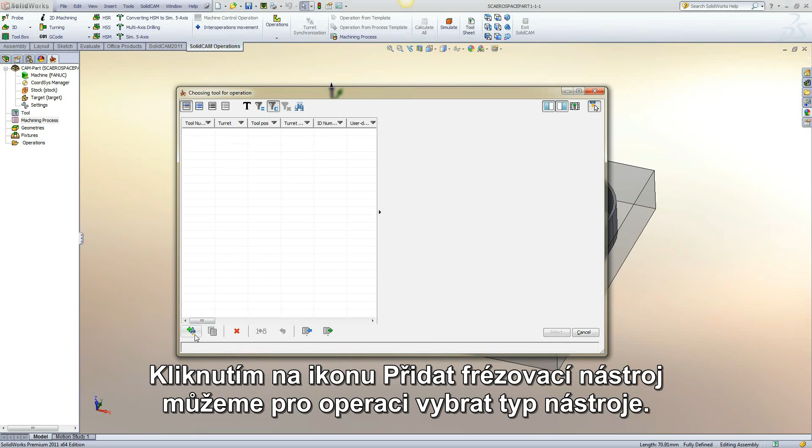By clicking the Add Milling Tool icon, we can select the type of tool to create for the operation. We will select Flat End Mill. Working from top to bottom, we must set the cutting diameter being used. We will use a 12 mm tool.

Setting the cutting length is important. The Technology Wizard uses the cutting length to calculate if multiple depths are needed to achieve the pocket depth. We will use 24 mm.

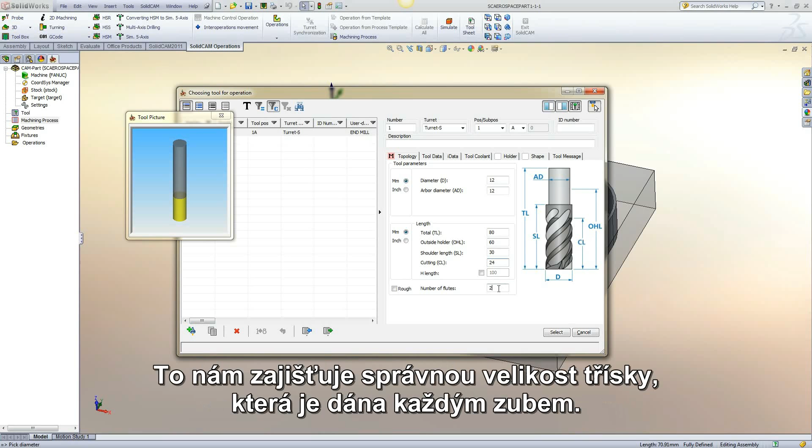Setting the number of flutes is also important. Setting the correct number of flutes will ensure the proper chip size is given to each flute. We will use 2 flutes.

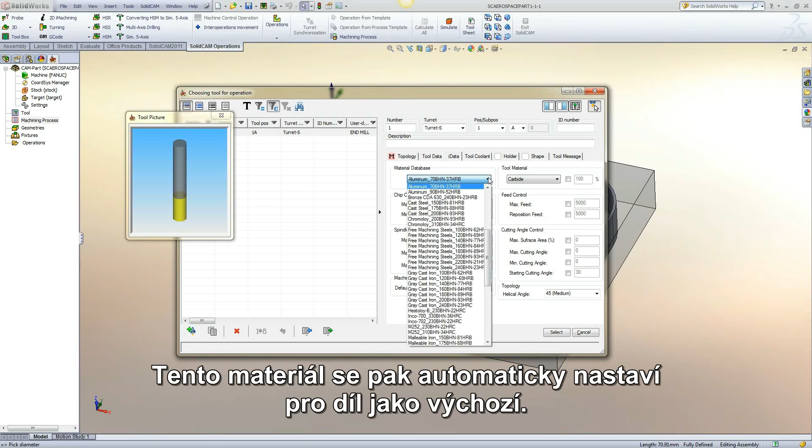The iData tab in the tool table is used to define parameters specifically to iMachining. It is possible to set a different material database for each tool. The database will be automatically selected using the part default. Selecting a different material database is used when machining different materials in one CAM project. A fixture is a good example of this. We will leave the default.

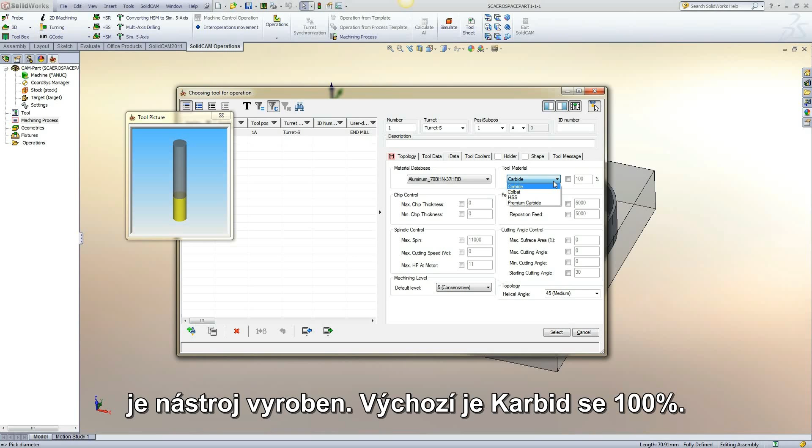Selecting a tool material adjusts the cutting speed for a given type of material the tool is made from. The default is carbide at 100%. By selecting a different material, a percentage adjustment will be used to calculate the maximum cutting speed. An override checkbox is provided so that a percentage adjustment can be set manually. We will select carbide.

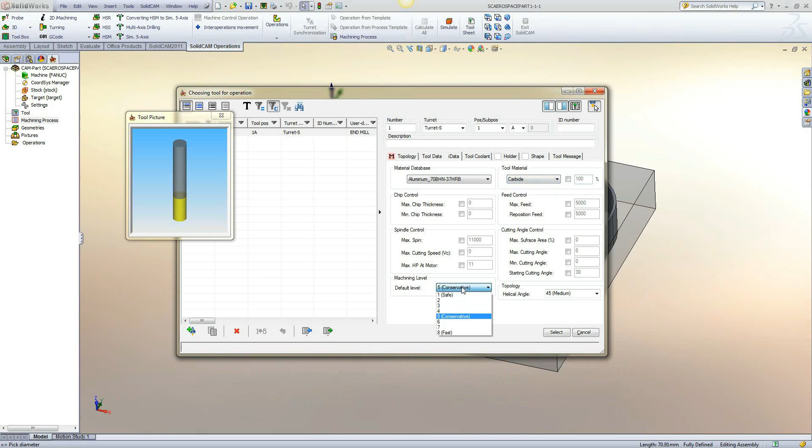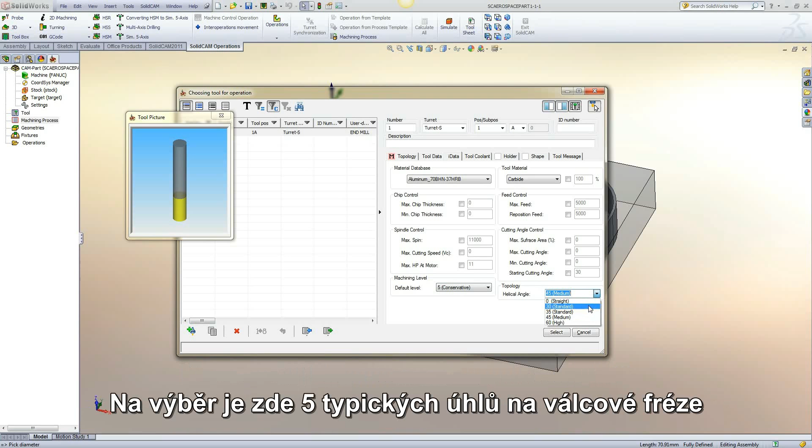Setting the default machining level will position the slider in the Technology Wizard to the level when selecting this tool. We will use 5. Setting the helical angle is important for calculating depths based on axial contact points, ACPs. There are 5 typical end mill angles to select from, or typing in a value can be used. We will use 45 degrees. After clicking Select, let's set the pocket depth to 30 mm.

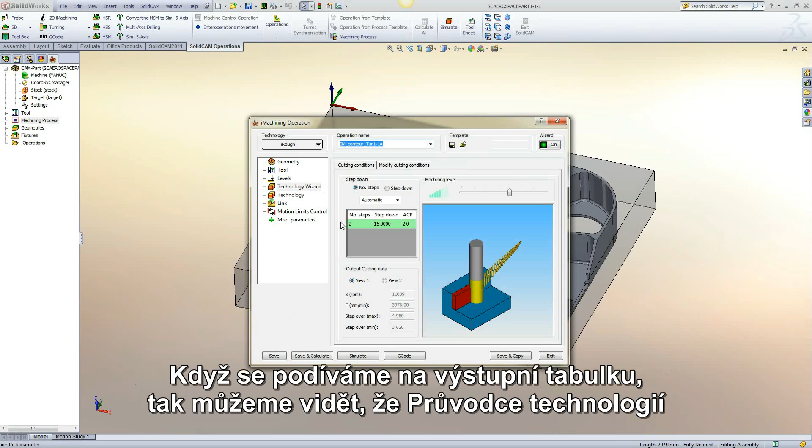Now we can go to the Technology Wizard and see how values were calculated based on the tool information. Looking at the output grid, we can see the Technology Wizard calculated 2 steps at 15 mm depth to give us the 30 mm total depth. Notice the ACP value is set to 2 and the depth is painted green.

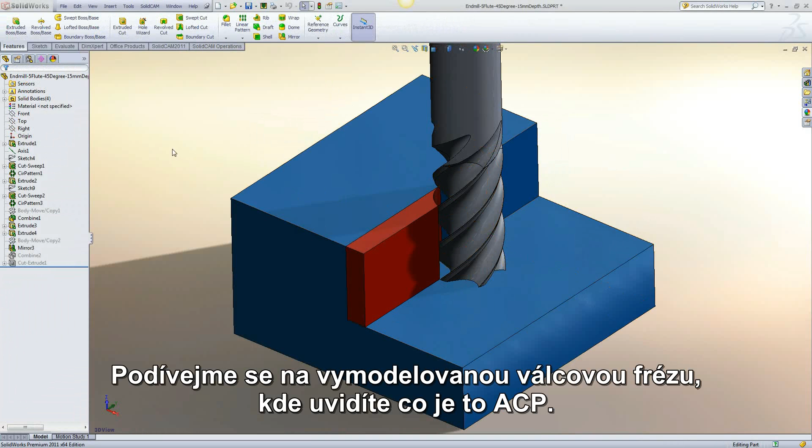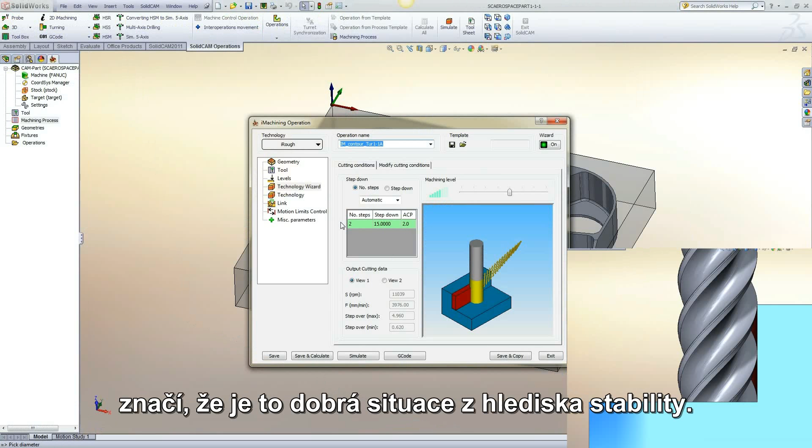Let's look at a fully modeled end mill and see where the 2 ACP value comes from. Here is the tool with the depth of 15 mm. We can take a sectional view of the contact area of the tool. Not counting the bottom point, we can see there are 2 contact points lined up vertically. This is where the 2 axial contact points come from. The green color for this depth in the output grid indicates that this is a good situation for stability.

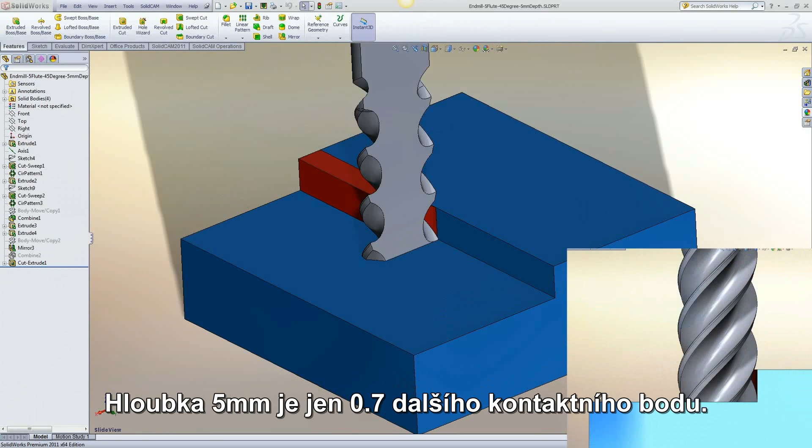Now let's change the pocket depth to 5 mm. The ACP is 0.7 and the depth is painted red. Back to the model to see how the flutes line up vertically. There is no contact point above the bottom of the end mill. The 5 mm depth is only 0.7 of the next contact point. The red field indicates this is not a good situation for stability.

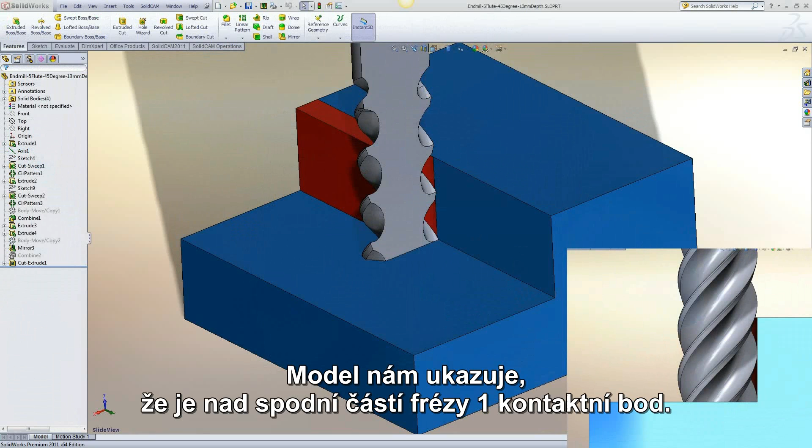Now let's change the pocket depth to 13 mm. The ACP now is 1.7 and is painted yellow. The model shows us that there is 1 contact point above the bottom and 0.7 of the next. The yellow is because we have at least 1 contact point above the bottom of the tool. Since there is at least 1 contact point above the bottom point, the situation for stability is okay.

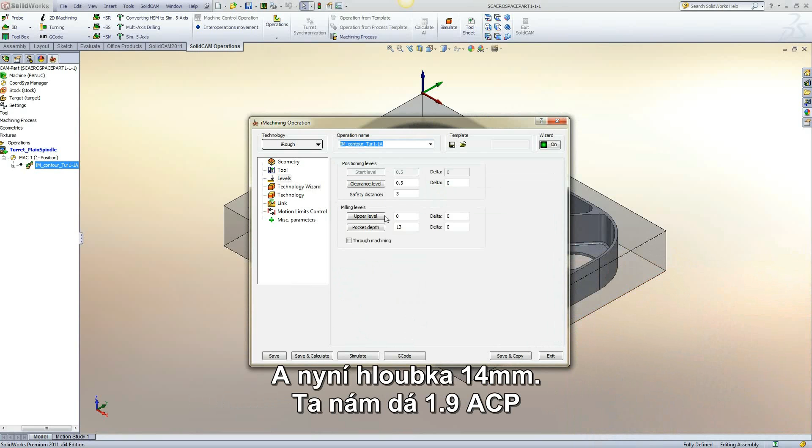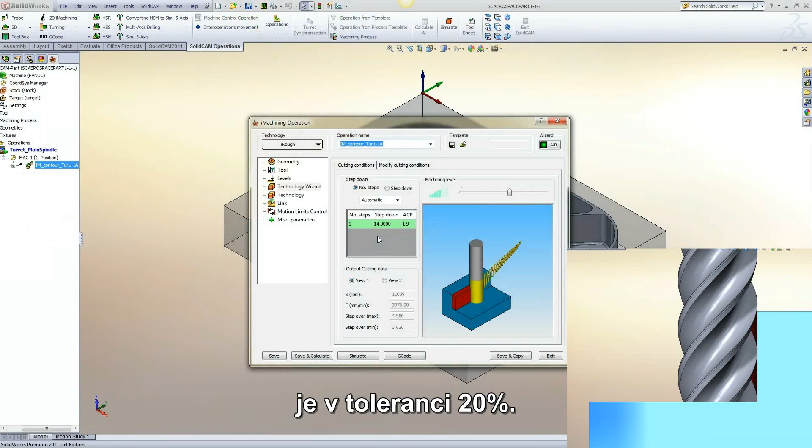Now a depth of 14 mm. This gives us 1.9 ACPs and paints the field green. Even though the depth did not give us a perfect 2 ACP, there is a 20% tolerance on any ACP over 1. 0.9 of the next ACP is within the 20% tolerance, and the depth gets painted green for stability.

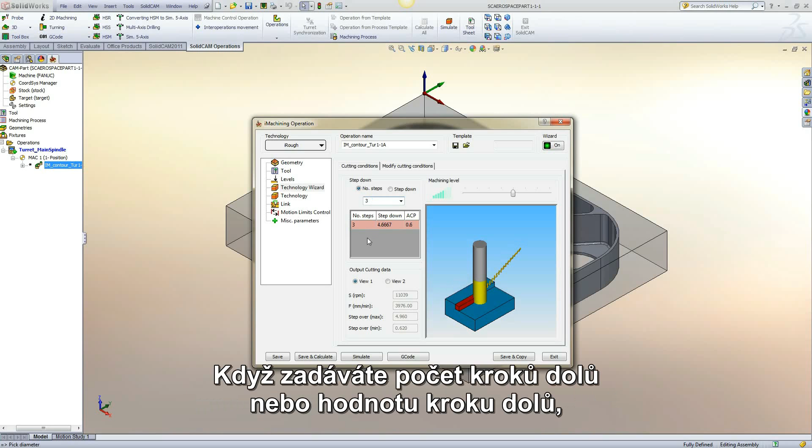Changing the diameter, number of flutes, helical angle, and/or depth will have an effect on the ACP. The wizard calculates depths based on ACP. When specifying number of steps or step down value, the ACP number and the associated color will still be shown. It is not possible to always be machining with preferred ACP, but by monitoring the ACP value and the cutting results, over time you may find matching a tool to the current depth to get good ACP is beneficial.